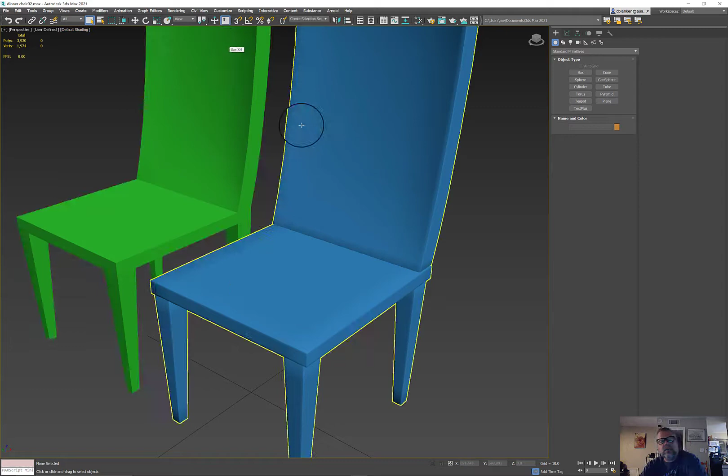Alright, let's see. We left off here. And what I wanted to do was get our low poly chair, which is super low poly. Actually, I'm going to keep that. And exchange it for our high poly chair, which I'm going to do a number on. Add some serious polygons here.

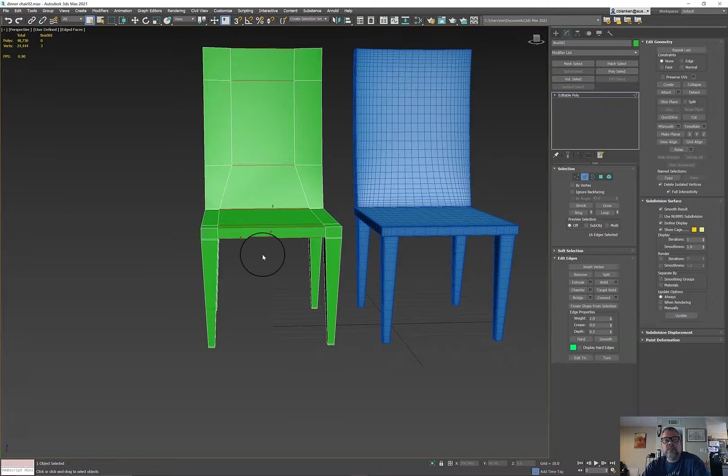And so what I want to do, let's go ahead and collapse that and make a commitment. Do this one. I'm going to keep the turbo smooth on this one. I like just enough of it. Actually, I'll tell you what, I'm going to axe it. But what I'm going to do is add some polygons to my low poly object, but I'll do it intentionally instead of just throwing a turbo smooth on there.

So let's go ahead and hit subdivide there. Always check to make sure you have the right objects or sub-objects selected. We'll hit plus so we keep it active. Select that one, hit plus.

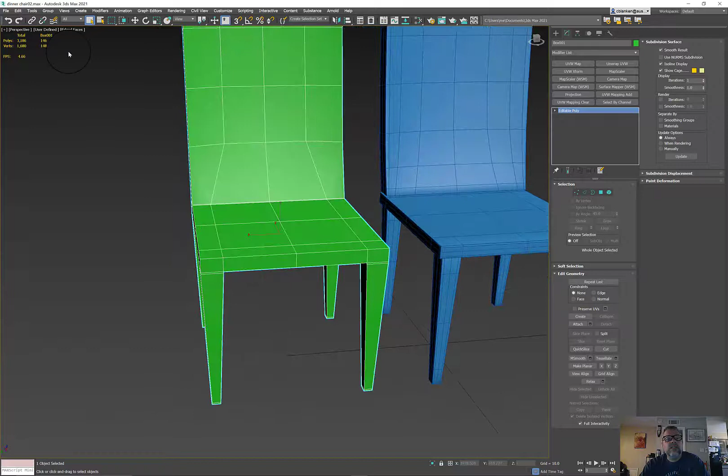Awesome. And I know that we're going to need to do the UVs, so let's go ahead and just bang out the UVs. Notice that I left all the chamfers that we did in class. I'm going to leave them there because it may just allow for better mesh painting, give me some more options, some other modeling. It's not a high poly chair at all still, so it gives us some wiggle room, and that's great.

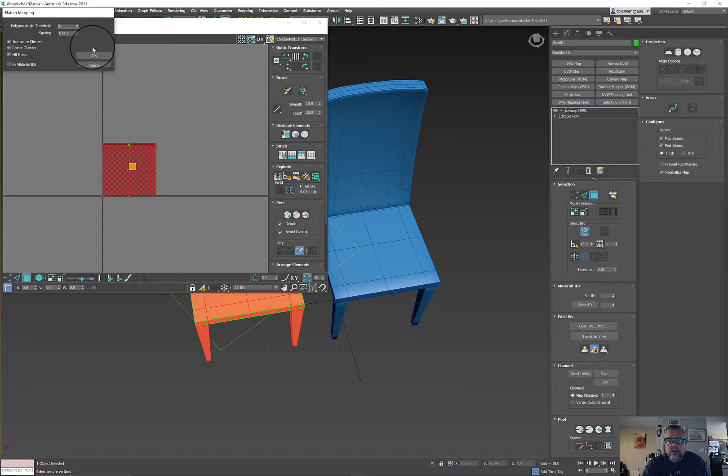Go ahead and do the UVs real quick. This should be a little cleaner. Sorry, 85, not 180. And we're going to break some things apart. Namely, I'm going to break the legs off.

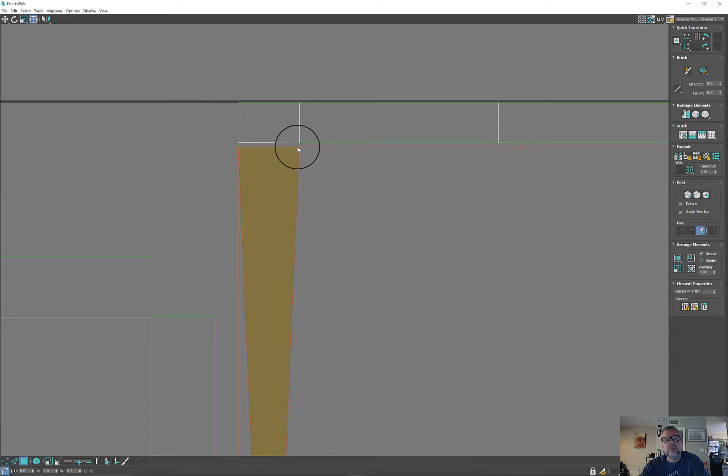Keep them separate. I know for a fact that I want to have them rotating in a certain angle, because when I get to Substance, I want them all lined up together so I don't have to mask each new layer off and create a whole bunch of hellacious, painful things. It's a lot more work than it needs to be. And since I want to paint some destruction inside my legs, that will be the easiest, cleanest way to do it.

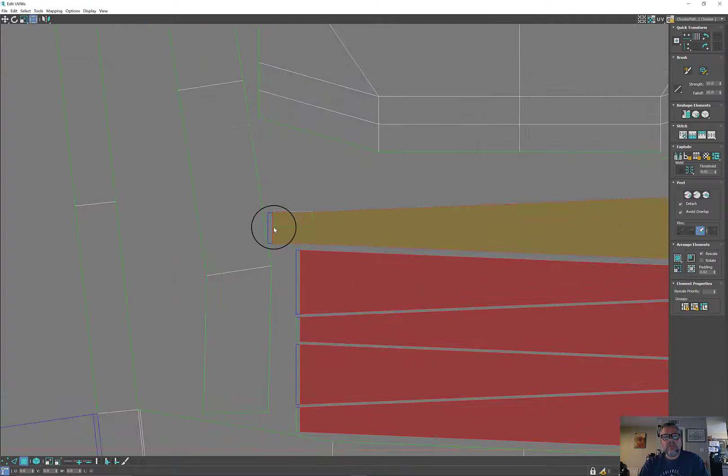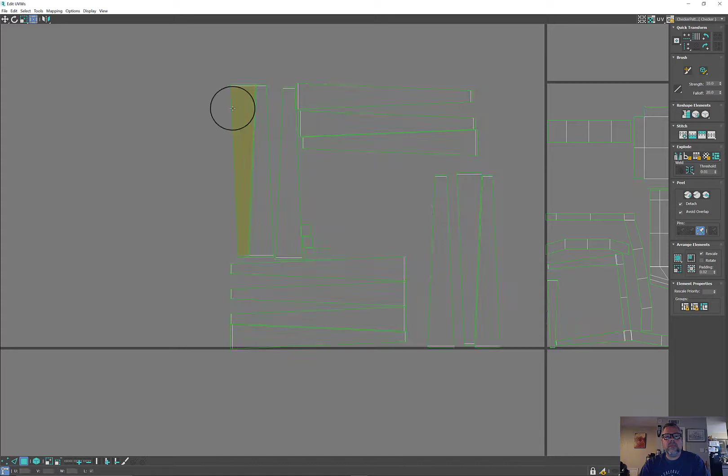I'm just making sure I get all those geometric shapes. I'm going to hit break. I'm going to go ahead and do a quick stack. And I know for a fact that's not what I'm going to want. There's a couple of thoughts in my head. One is that we have them go back and forth so we have them straight up and down. Or the other one is just weld them into single islands.

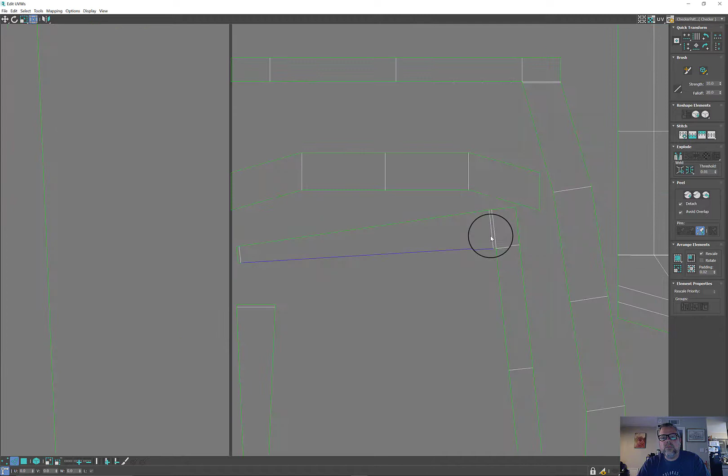Just stitching away. Oopsie. Got something hiding over there. Aha. Forgot you. And you. Cool. Break. Awesome. Now let's grab all these. Since I broke them off and they're different sizes, let's just restack them. Get them all in the same size. And we'll just keep rolling with that.

Stitch selected. If you really want to be specific about what's going on in terms of their location, like you want the front of the legs to be in a very specific spot on your UVs, just take the time to make that happen. So if I wanted, say, for instance, these two to be the center of their legs, so I know where they would be to paint them.

Choosing that to select it. Turn that off. Now what I will do is go to edge mode and I can stitch as if they're the center and then choose one side or the other to be the back. But then that allows me to know for sure where these pieces are.

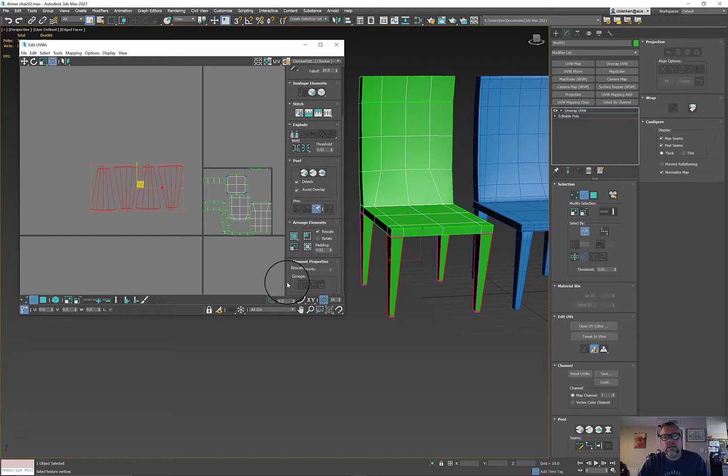Right. So what I'm going to do here, go to polygon. Oh, it wasn't polygon. Go here and I will group them. Polygon. Group them. That way now I can just stack them and they'll stay oriented like I have them. If I want to go back and flip them and have them all face the same direction, that is definitely a potential consideration. Let's go ahead and pull the backs off.

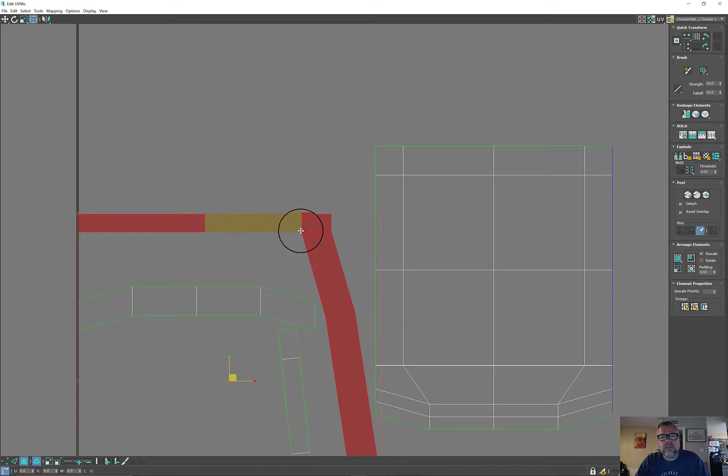This is going to the back, and if I wanted to, I could flatten this. This is the top of the chair. It may create some skewing, but I think we'll be all right.

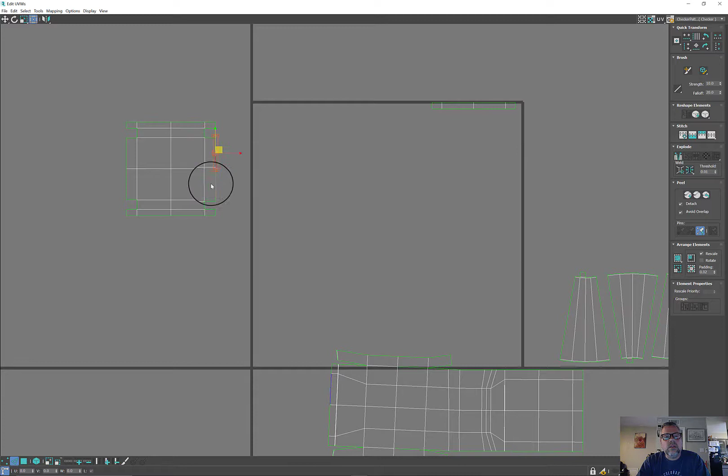This is the bottom. Stitch selected. I think what I'm going to do is take the top and the back off and make them separate. Make things a little cleaner. Now that these things are lined up more effectively on the grid, we can move forward.

One of the options I was thinking about, this will create some interesting stretching as well, but it's on the bottom of the leg and it may not make as noticeable a difference, but we're willing to give it a shot. Just square this all up.

This would make it all squared up and it'll taper with the actual geometry on the 3D shape, and I kind of like that. Let's go ahead and stick with it, and do that real quick with all of these. That way I can set them up this way.

I'm holding Control Alt - it keeps it scaling from the center and keeps it proportional. Alright, let's see - did that group still? Let's undo that. Let's grab these guys, we can do this real quick. I go here, it's like this one. I can select by group and then just ungroup it.

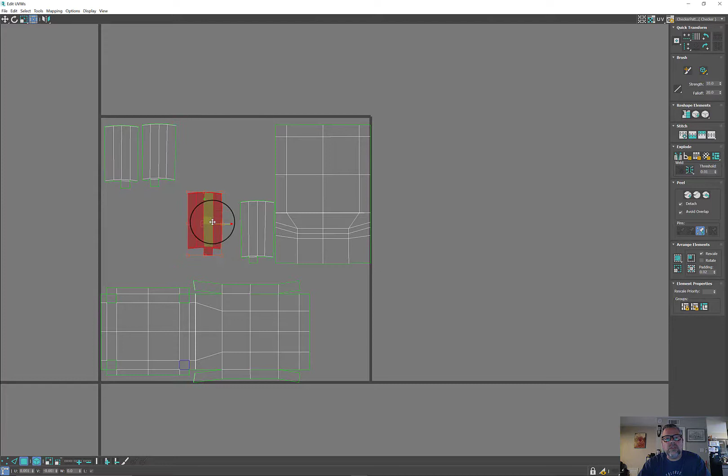I want to go ahead and maximize my texel density. It's just a dinner chair, but if I do want to do some cool detail, this will allow it. Just a little bit.

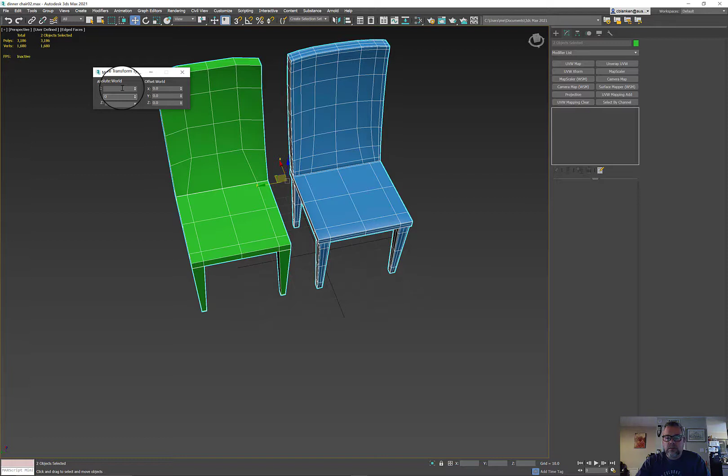So UV layouts, playing Tetris. Alright, so there's our UVs. Collapse. So let's go ahead and center these back up on the X and the Y. Let's see.

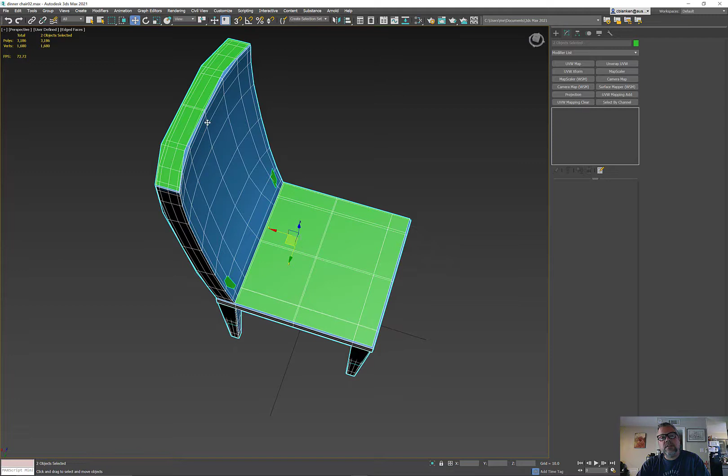Okay, so our next step is to basically get our meshes to match up a little more effectively. The high poly is definitely the better looking version, and since I added polygons just by cutting the object, there's some squareness in our green one.

So I'm gonna grab our blue dude. Let's rename him real quick - I'm gonna say D_chair, D for dining, and I'm just gonna say capital HI. Actually, I like lowercase hi - that means high poly. And I'm gonna click on this and say freeze selection.

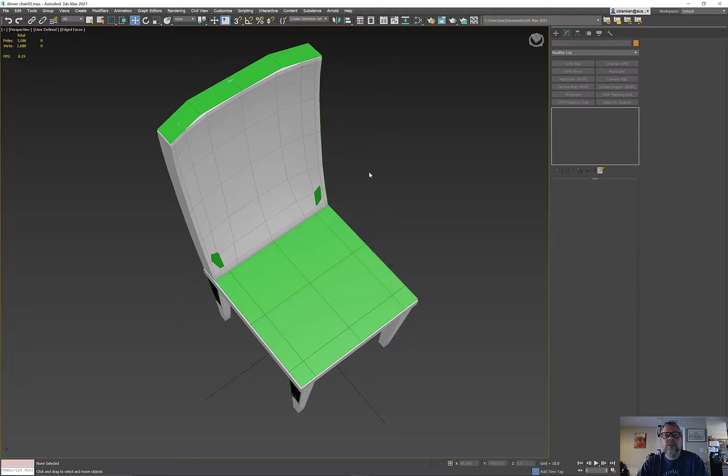Okay, I can't select it. It makes it easier to select the piece that I need to work on, which is the chair. This will be 0, 0 because this will be our game object.

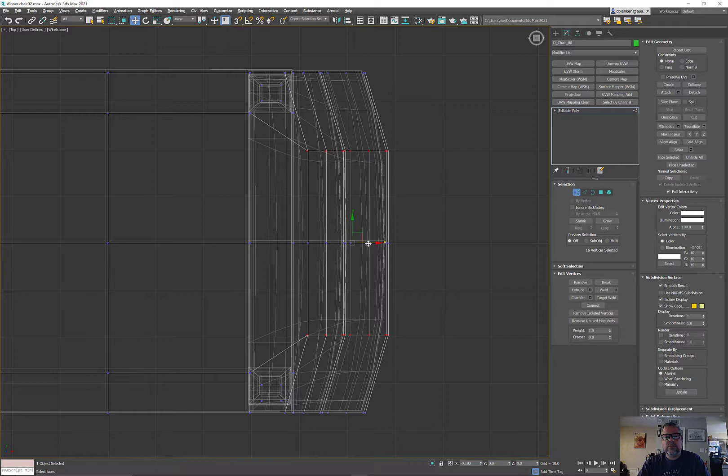I'm going to go into our top view here, and just pull these shapes together, kind of work that curve a little bit more like what's in the actual high poly version.

Next thing I need to do is align my legs on the high poly to fit inside the low poly, but right now I just want to make sure that the low poly is good. If I want to unfreeze things, you can just hit unfreeze all.

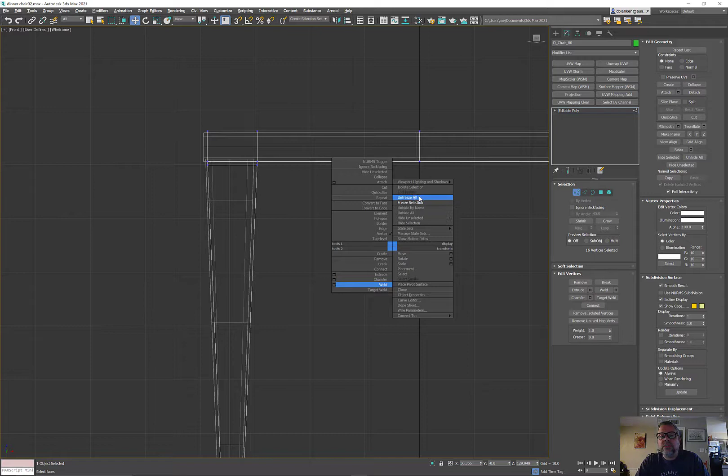We'll go to the high poly. You want the polygons to match as closely as possible. TurboSmooth - let's go ahead and collapse that. Right, first off, let's just make that an editable poly.

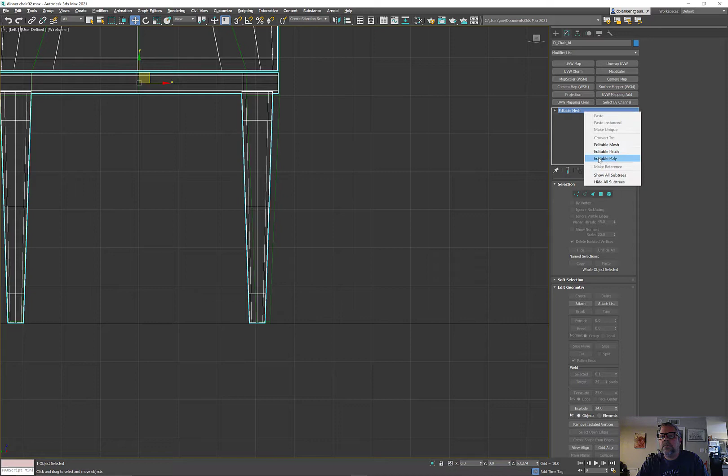I got some issues here, so I want to grab those vertices, probably all the way up, and just slide those over so they fit. Select those. Get rid of that selection. There we go.

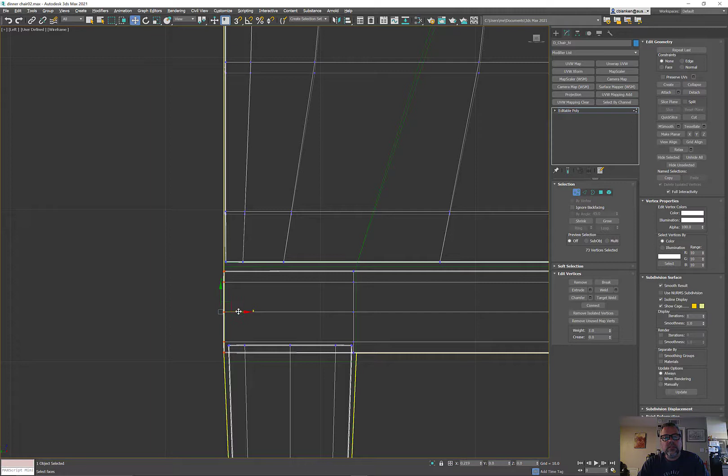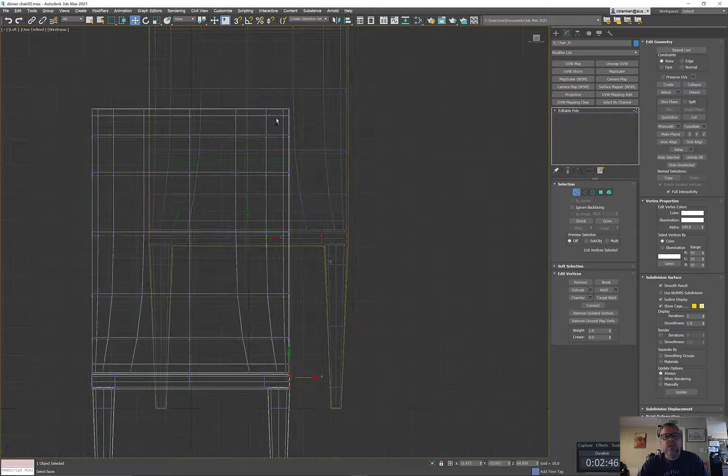If you've got multiple vertices in the way, like for multiple sub-objects, select one, hit Control, and then left click on the things that you want, and then you can deselect - sometimes a lot easier. Just a little bit.

Alright, so as long as our low poly object has UVs and our high poly object matches pretty closely to our low poly object, we should be able to grab the details off of our high poly object and slap them into our low poly object as a normal map.

And then go over to Export Selected. Dinner chair, this is my dinner chair low, so we'll go ahead and just say 00. Export out, and then we select our high poly. We'll go ahead and export selected and chair. So we got a high and a low.

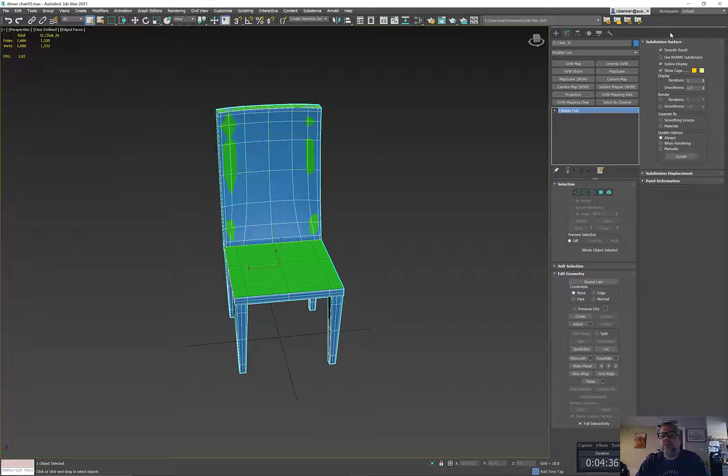Let's go ahead and save this as a new scene. So good. And then I'll be right back and we'll look at substance.